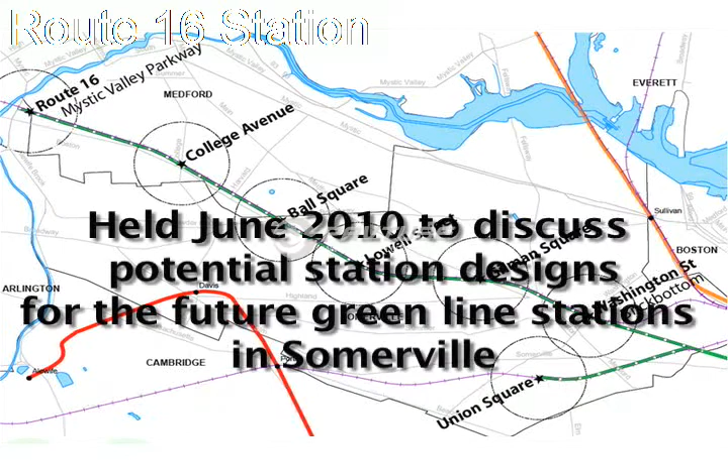This station is one of the greenest of the Green Line stations, for reasons I'll get into later. I'd like to make a brief pitch for Medford, because several of these stations are either in Medford or right on the border. The Route 16 station is actually in Somerville, but surrounded by Medford on 3 sides. College Ave is actually in Medford, and Ball Square is also in Medford, even though surrounded by Somerville as well.

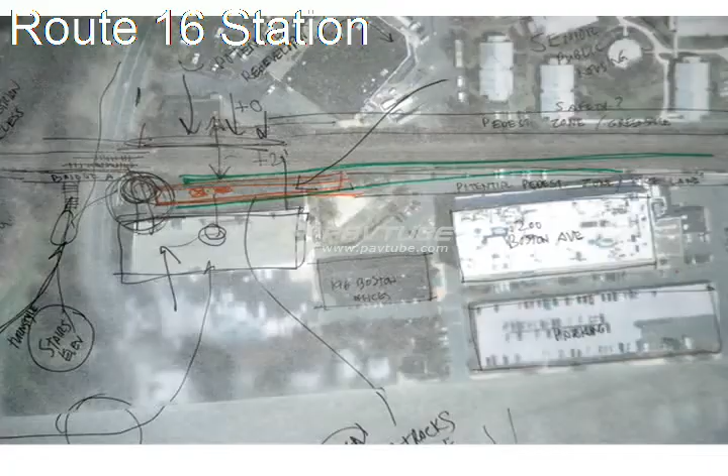The basics of our proposal are that we're trying to connect all 3 communities to this station. We're proposing to reuse the existing U-Haul building rather than tear it down and build a station right on top of it, because we feel that building could easily be adaptively reused without too much of a stretch, and actually serve many of the functions that would go in a Green Line station, including bike storage, offices, small retail, even housing on the top floors, since it's a 5-story building.

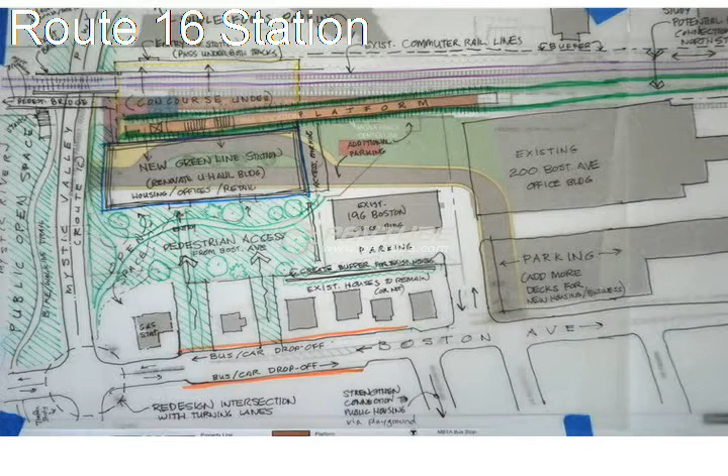Connectivity is what we talked about for about an hour at that first meeting, because we're trying to get people from all sides of the site to come and have an easy way to get there. We have Whole Foods on the other side of the tracks, existing office buildings to the right, and 2 housing projects very close, one in Medford up here and one in Somerville over here.

We want to make sure that whatever is proposed has a very strong physical connection, either along the tracks or along Boston Ave, to get to the station, again to get the ridership as high as possible.

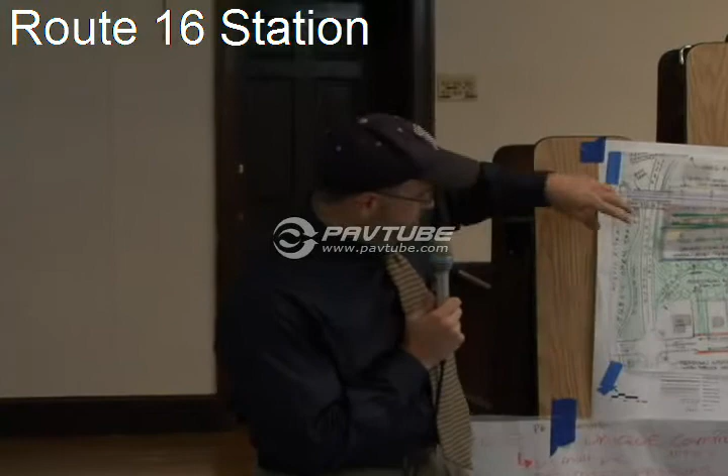We're proposing to keep the U-Haul building and make pedestrian connections along the Mystic River, create a green space in the foreground, and check as many connections as we can: a pedestrian bridge to West Medford Square, redesign this intersection, try to bring people along the tracks, and connect under the tracks as well.

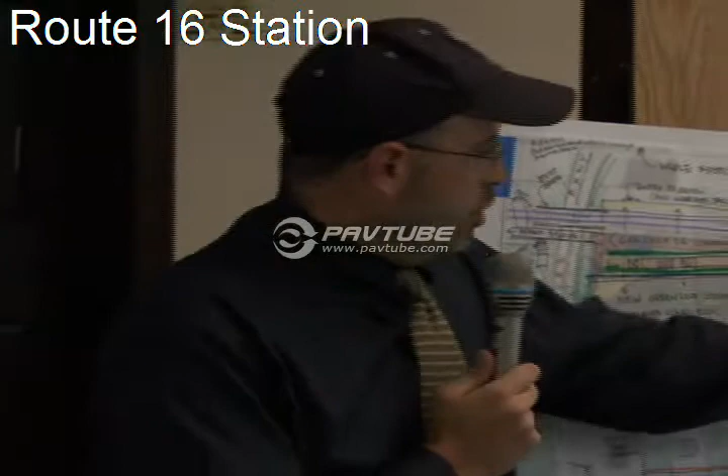We're trying to get as many people there as possible, and then rise up in between the platforms and get onto what is the terminal line here. This is the commuter rail line running by here, going to Lowell on the left side.

We have some challenges because we're about 200 feet from the street at Boston Avenue. So we're proposing a bus and car drop-off and redesign this whole intersection and area, finding a way to filter people either between these houses, since there are actually some right-of-ways, or possibly with takings of the gas station on the corner.

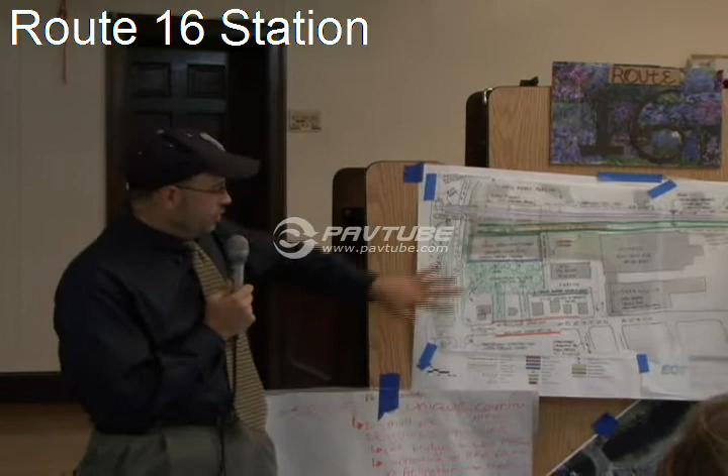We want to really connect the green space that is the heart of this station, because what you have along this edge is a bike and walking trail that will connect from Alewife to here, and ultimately all the way to Wellington. You'll have the orange, red, and green lines all connected by bike. So we think there's enormous potential for ridership just on bike here, probably more than almost any other station I can think of, in addition to being fed by the 80 and 94 bus lines that run along Boston Avenue.

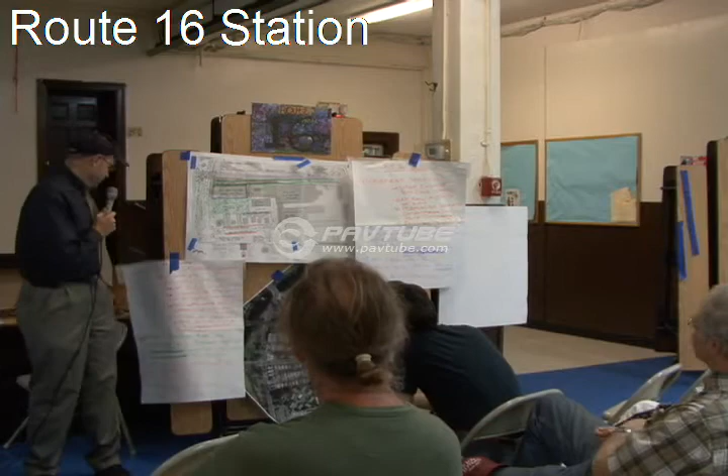Just a couple of highlights, if I could. Again, the critical thing is, if you can preserve the U-Haul building, you really preserve the fabric of the neighborhood that's been there for 100 years. You have a lot of old industrial and factory buildings here that have been renovated, and we feel the U-Haul building really fits right into that context.

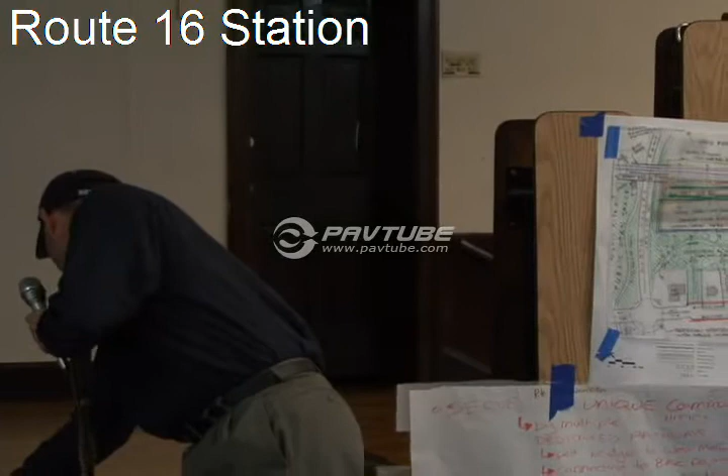So we're trying to basically create as much green space as possible and reuse the building, like I said, for all kinds of functions. Just some of the bullet points we talked about.

There's a lot of traffic studies that need to happen in order for this project to work. We have a very dangerous Mystic Valley Parkway that is extremely difficult to cross right now, so things like pedestrian bridges and redesigned intersections from Medford, Arlington, and Somerville are really important to get people here safely, because safety is a real challenge for this station.

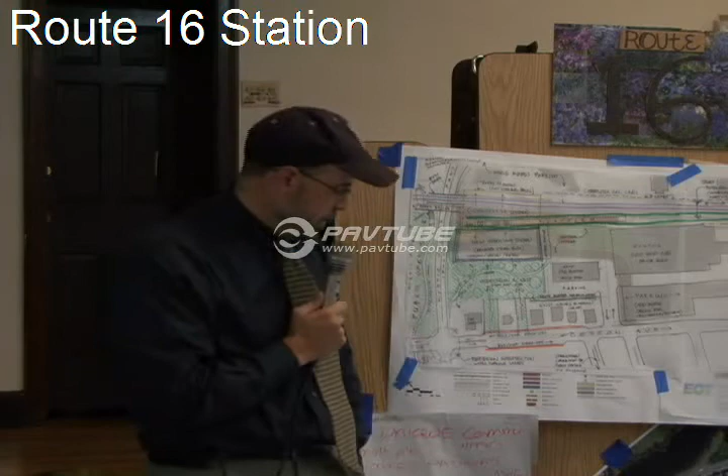This is really a small highway. It used to be a pleasure road, but it's become something much more than that over the years. So there's a lot of work that needs to be done there.

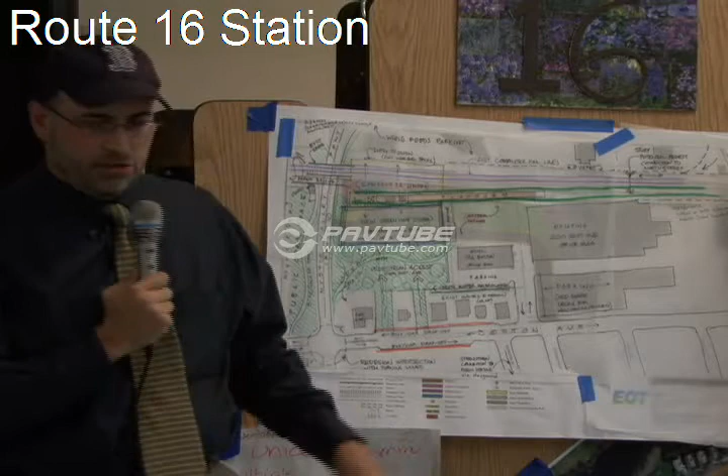There are certainly options to rebuild and reimagine the public housing, and possibly have the Whole Foods transformed over time as well, because of the transit development, which I think is a major feature of this site. Really, the whole area, other than these 5 houses, is primed for development. There's so much potential in those existing buildings to feed the station, both as a place to live and work, and even for entertainment.

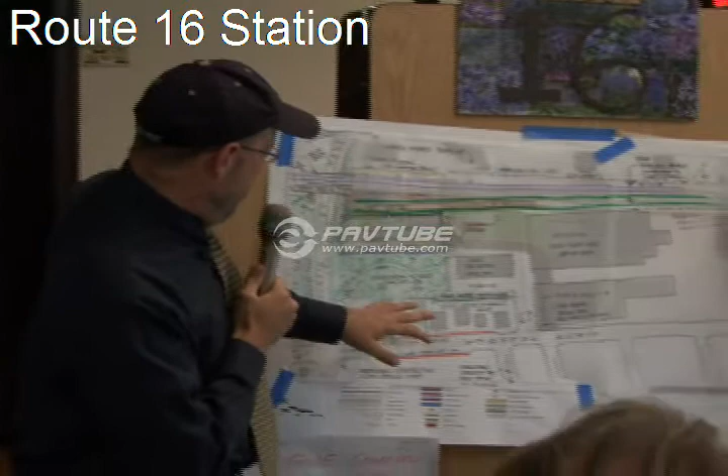One minute. Sorry. The other thing that has come up: we don't have a direct bus drop-off at the station. We have some accessible parking back here, but it's a bit of a walk right now. It's actually physically challenging to get buses to drop you off right at the station.

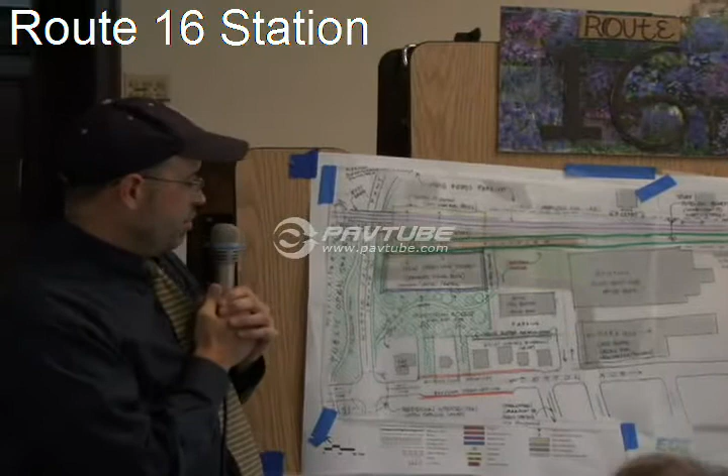It creates a lot of havoc in here, and we've been fighting to make sure we preserve these buildings. The original design for the T actually took this building, and we challenged that a long time ago to make sure that didn't happen. I think their latest design will prove that it doesn't have to happen that way.

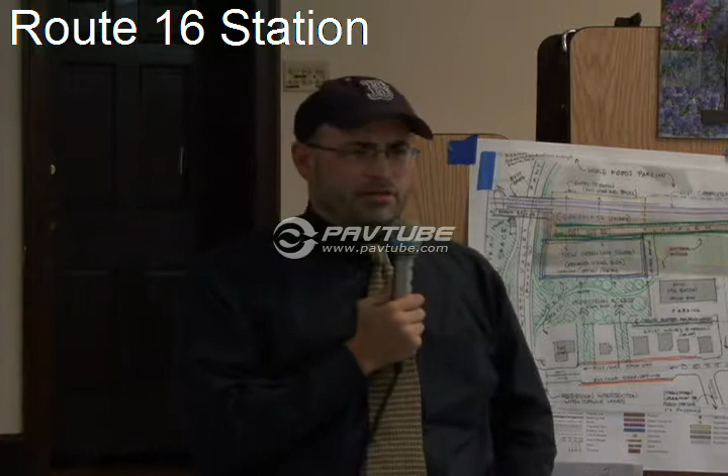Anyway, to sum up, I think this is a great terminus station. This is really very positive, because the ridership for the whole project goes up so much higher when you go to Route 16. That extra 3/4 of a mile really brings about 10,000 people who live within, I think, a 1/4 mile radius of this station. So we're really excited to make this a great terminus.